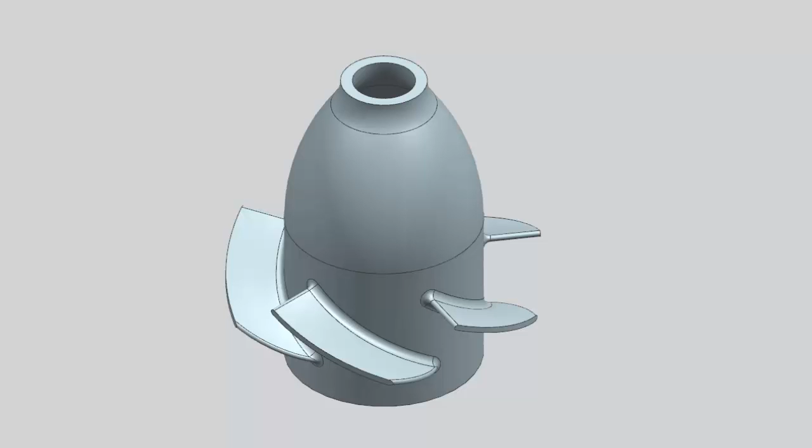Welcome to another in the series of demonstrations designed to get you quickly up to speed with what's new in NX CAM. This video will demonstrate how you can perform hybrid manufacturing by combining an additive metal deposition process with the traditional NC machining subtractive process to produce highly complex finished parts using a single machine tool setup. In this example, we'll use hybrid manufacturing to create a rotary part.

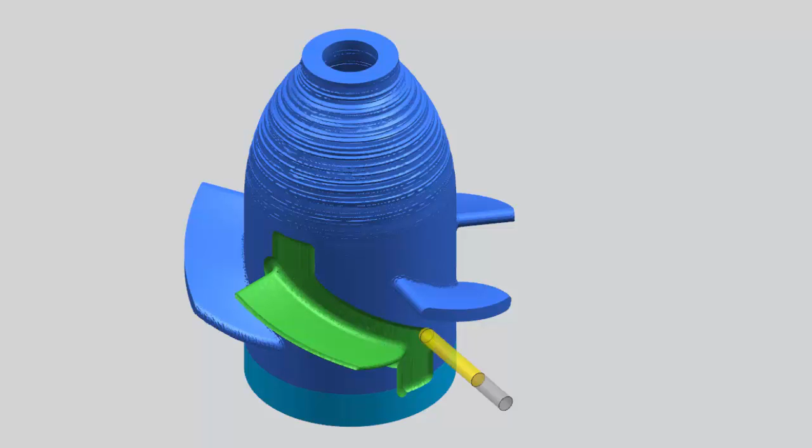Note that you will need to have an appropriate license to perform hybrid manufacturing. Let's take a look at the objects required to perform hybrid manufacturing.

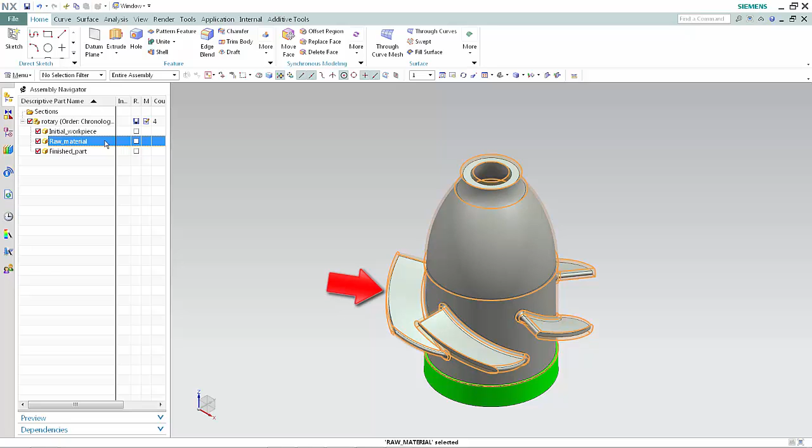The initial workpiece is the plate or base that the material will be deposited onto, and it's clamped into place as part of the setup. The additive raw material is what will be built through the additive operations. It will be selected as the blank geometry for the subtractive operations. The finished part is the final outcome of the hybrid manufacturing process and is the product of both additive and subtractive operations.

We'll begin by creating the setup. Select File New. Select the Additive Manufacturing tab. Select the template. Click OK.

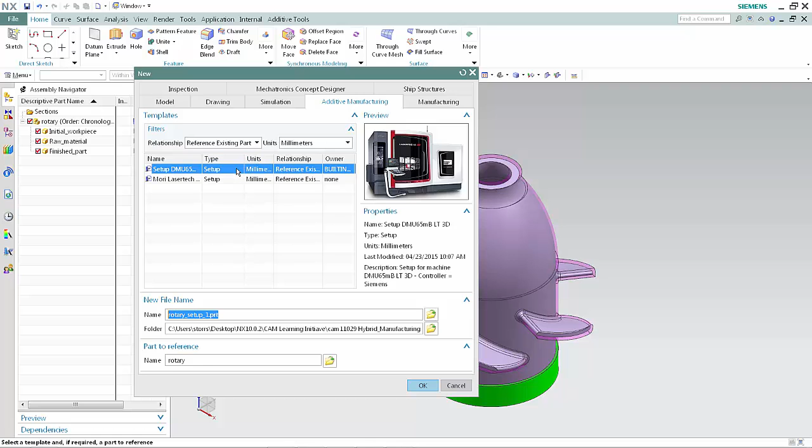The next few steps will remove some of the unnecessary clutter from the graphics window. In the Assembly Navigator, select the checkboxes so that only the initial workpiece, raw material, and finished part are displayed.

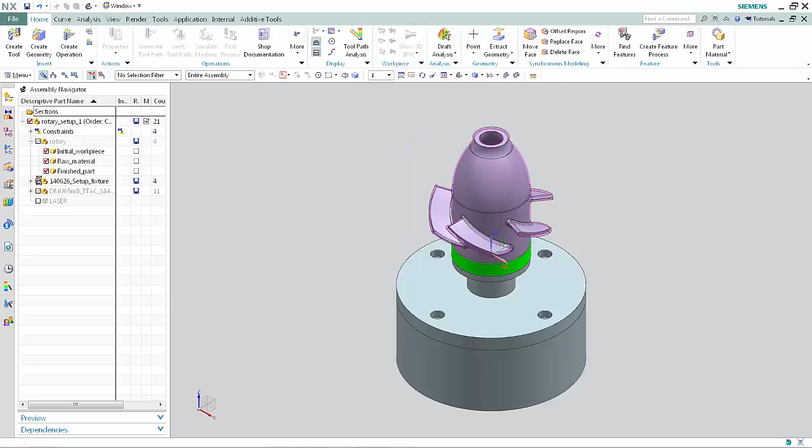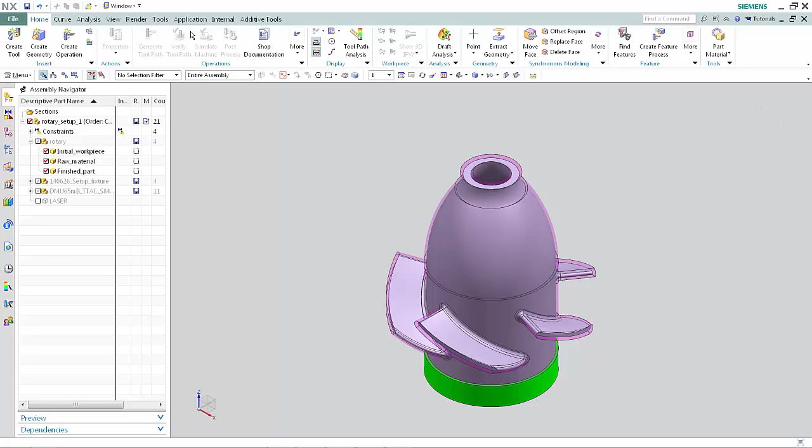Next, we'll create an associative copy of the initial workpiece, the additive raw material, and the finished part bodies. These associative copies are the bodies we'll decompose into additive features and then use for the additive and subtractive operations. Select the Applications tab and select Assemblies in the ribbon bar if it's not already turned on.

Select the Part Navigator tab in the Resource bar. Select Menu, Insert, Associative Copy, Wave Geometry Linker.

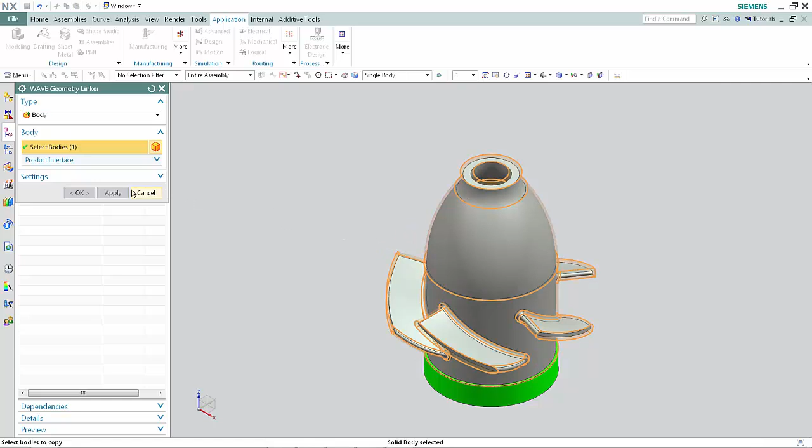Select the raw material. Click Apply. Select the finished part body. Click Apply. Select the initial workpiece. Click OK.

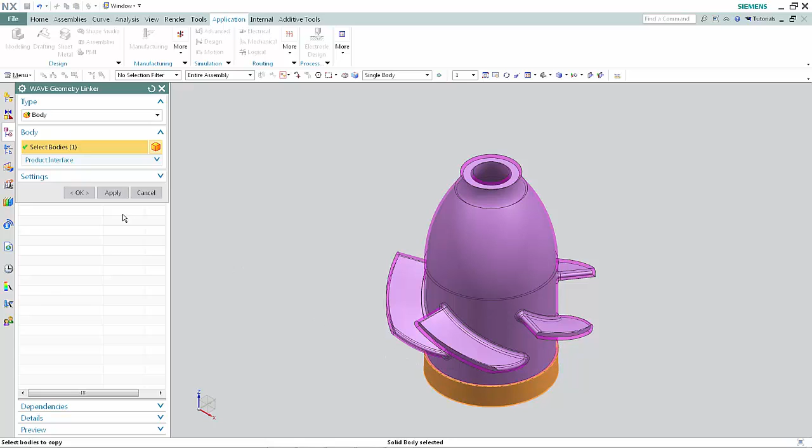Notice the three wave-linked bodies in the Part Navigator. Rename the three bodies.

For now, we will only need to work with the additive raw material linked body, so we'll hide the unnecessary geometry. In the Assembly Navigator, select the Rotary Assembly checkboxes to hide the objects.

Select the Part Navigator tab in the Resource bar. Right-click Finished Part and select Hide. Right-click Initial Workpiece and select Hide. Only the additive raw material linked body should be displayed.

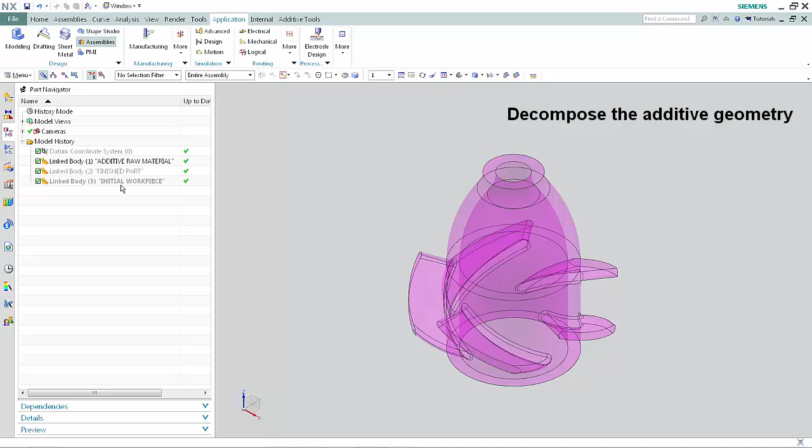Decomposition allows you to divide raw material into individual additive features by extracting bodies. Each additive operation requires a complete body or set of bodies. You may decompose explicitly or automatically.

Explicit decomposition allows you to decompose a specific volume of raw material by specifying a plane that terminates the decomposition at an explicitly defined location.

Select the Additive Tools tab in the ribbon. Select Decompose. For Select Part in the Decompose Part dialog box, select the displayed additive raw material body. For Select Face, select the face on the bottom of the additive raw material as the starting face.

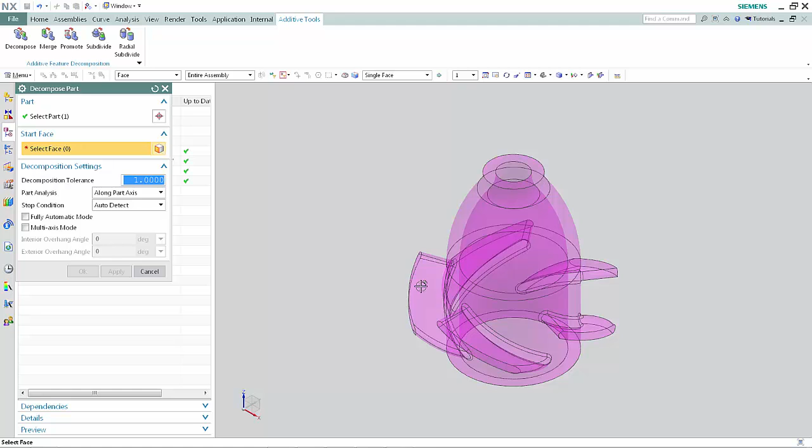Type 10 in the Decomposition Tolerance box. The decomposition tolerance is the increment that the processor uses to step along the part. Larger values result in faster performance, but the value should not be so large that small features will be missed.

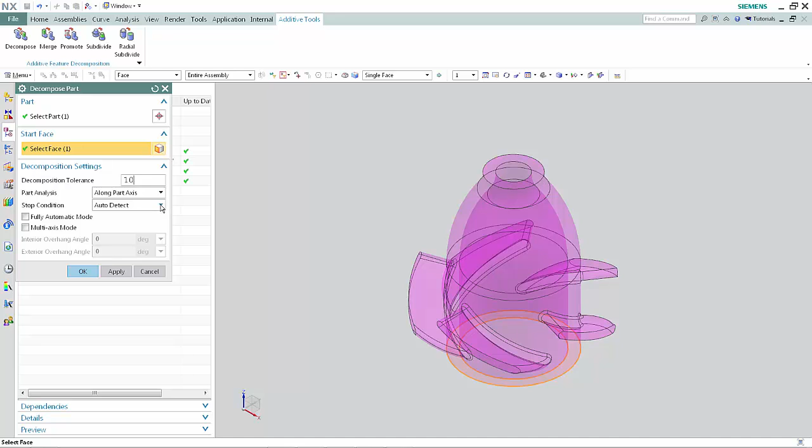Select Stop at Plane from the Stop Condition list. This option allows you to be very specific about the portion of the body you wish to decompose. Select the edge of the additive raw material just above the blades. Click OK.

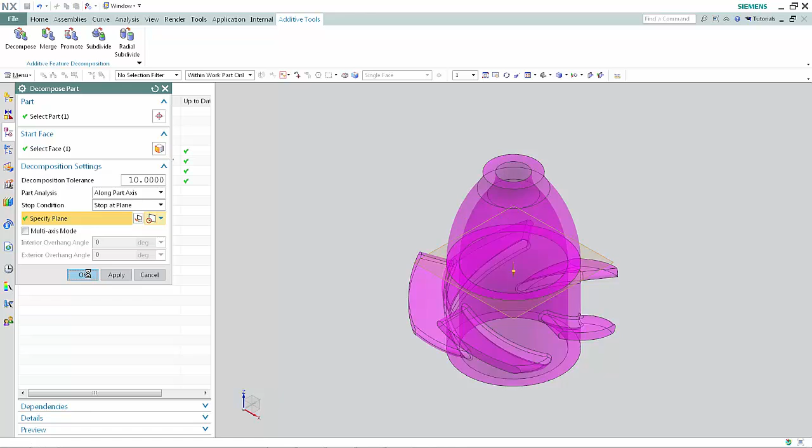The portion of the body between the selected face and the plane has been decomposed into additive features. These new features can be used to create an additive operation.

Next, we'll specify the geometry needed for the additive operations. The base plate is the body onto which the additive material will be initially deposited, and the raw material represents a slightly oversized version of the finished part.

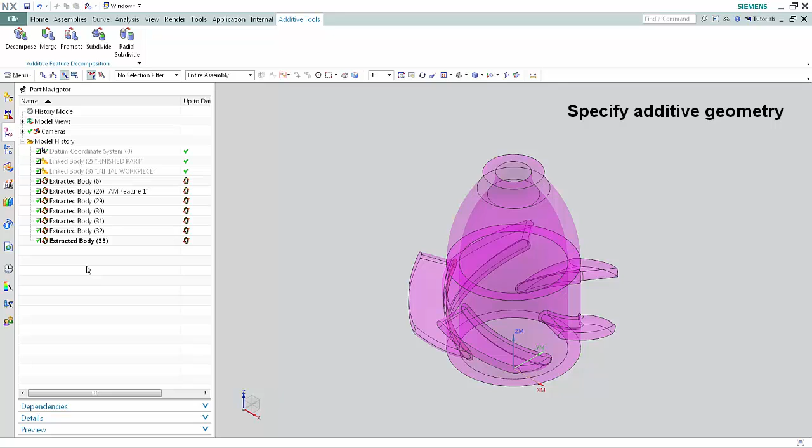Right-click Initial Workpiece and select Show. Select the Operation Navigator tab in the resource bar. In the Geometry view, double-click Hybrid Geometry to edit the object. Click Specify Initial Workpiece.

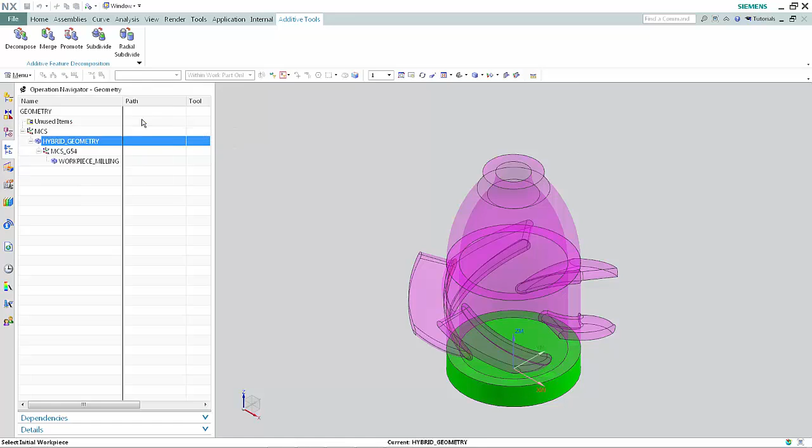The initial workpiece is the plate or base that the additive material will be initially deposited onto. Select the base as the initial workpiece. Click OK.

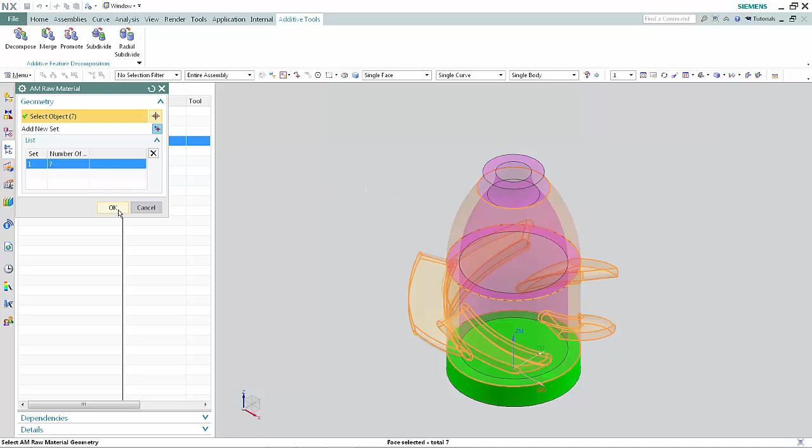Click Specify Additive Material. Select the 7 extracted bodies. Click OK. Click OK in the Hybrid Geometry dialog box.

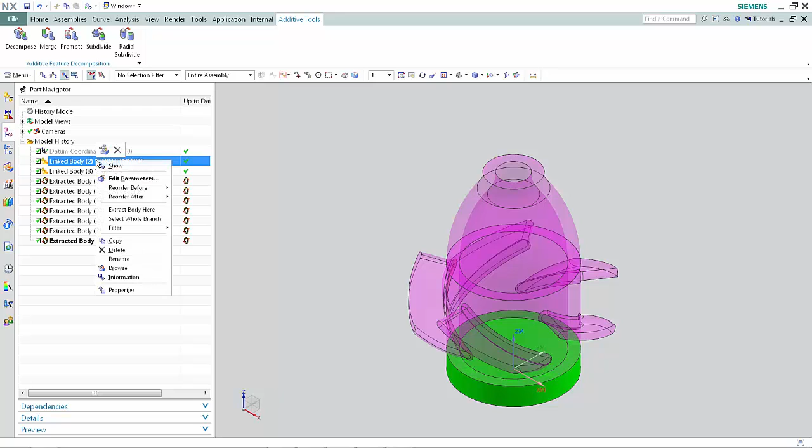Now we'll specify the part and blank geometry for the machining or subtractive operations. Select the Part Navigator tab in the resource bar. Right-click Finished Part and select Show so that the 7 extracted features, the initial workpiece, and the finished part are all displayed. Select the Operation Navigator tab in the resource bar.

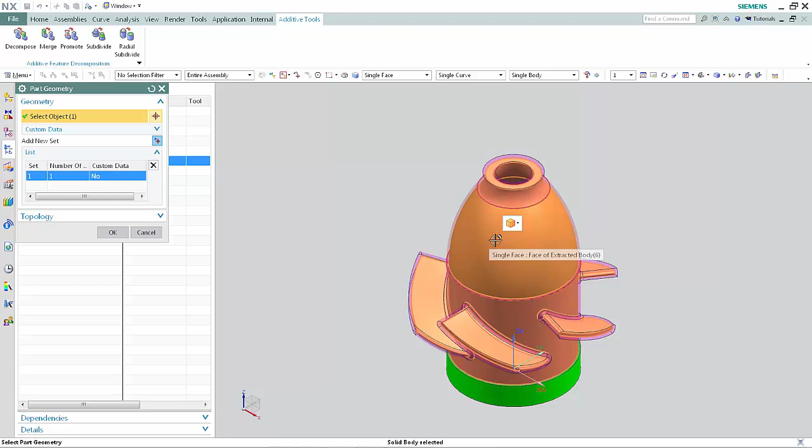Double-click Workpiece Milling to edit the object. Click Specify Part. Select the solid gray body of the finished part as the part geometry. Click OK in the Part Geometry dialog box.

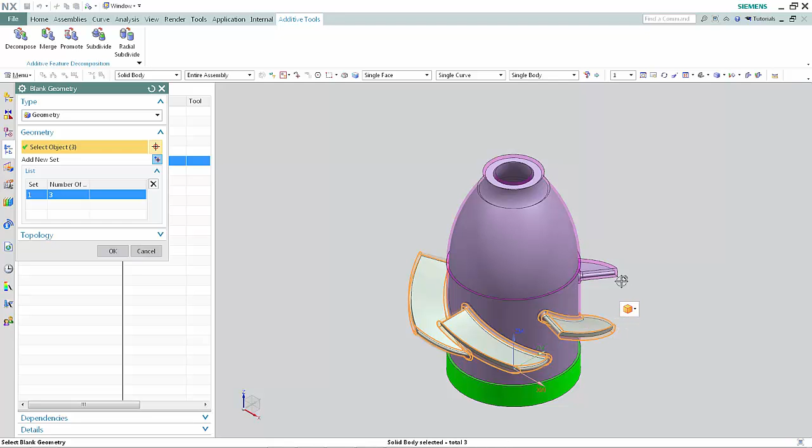Click Specify Blank. Select the 3 extracted bodies as the blank geometry. Click OK in the Blank Geometry dialog box. Click OK in the Workpiece Milling dialog box.

The first additive operation will use planar slicing and a fixed tool axis to form the cylindrical body. Before creating the first additive operation, we'll hide the finished part and the initial workpiece. This will allow us to see the material deposition as the initial workpiece is created.

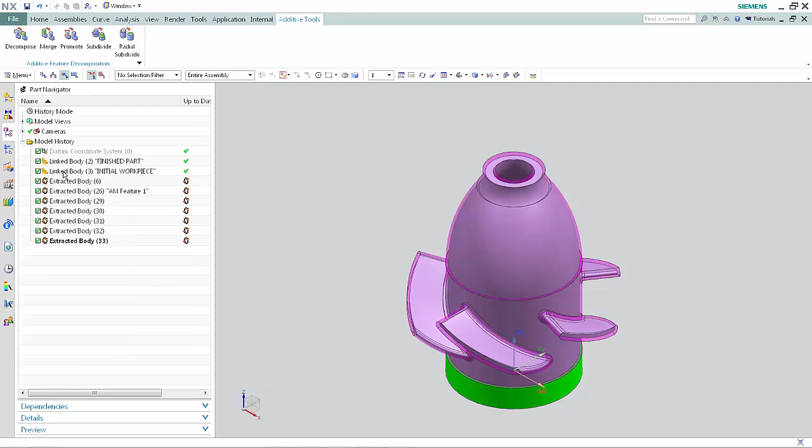Select the Part Navigator tab and hide all of the objects except Extracted Body 26. Select the Home tab. Click Create Operation.

Select Additive from the type list. Select Planar Additive Spiral Inward and Outward as the operation subtype. This operation subtype deposits material in successive planar layers using an inward or outward spiral pattern. Specify the parent items.

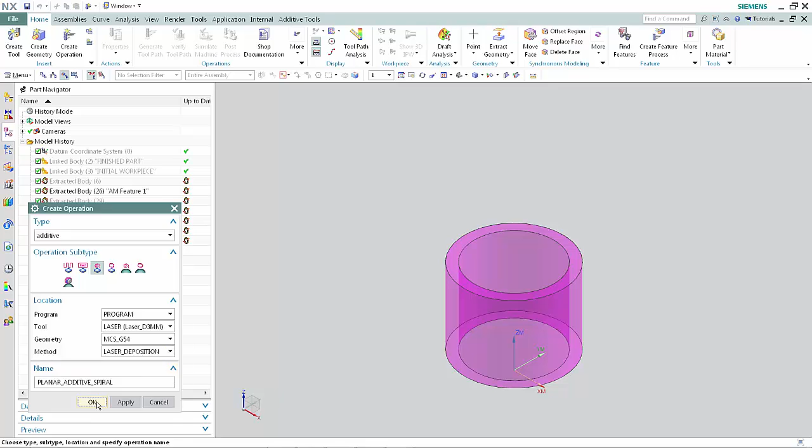Click OK. Click Specify Additive Feature. Select the body you wish the additive feature operation to create. Click OK.

Type 3 in the Layer Thickness box. This unusually large value will allow you to see the individual layers more clearly. Realistically, the layer thickness would be much smaller than 3 millimeters. Click Generate.

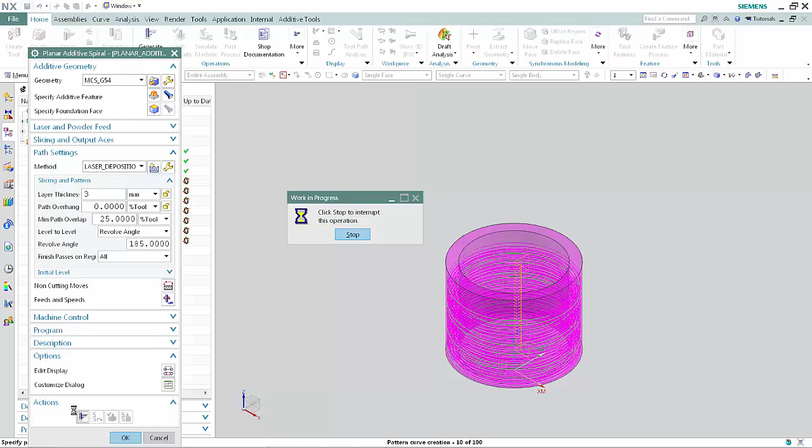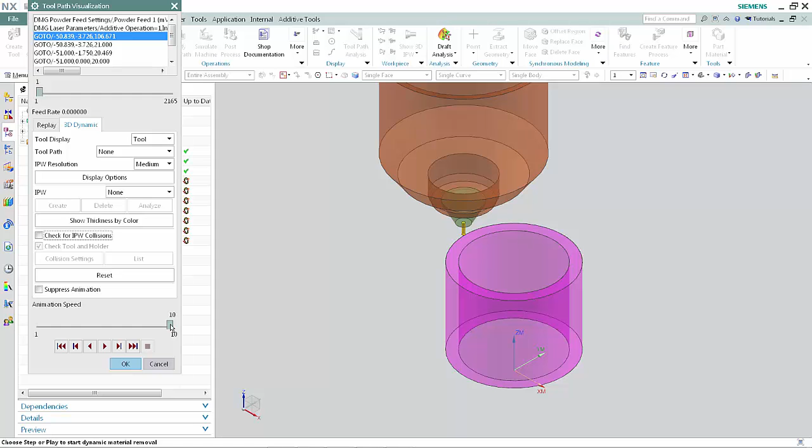Now we can visualize the additive material deposit. Select Verify. Select the 3D Dynamic tab. Clear the Check for IPW Collisions checkbox. This will improve processing time. Set the animation speed and click Play.

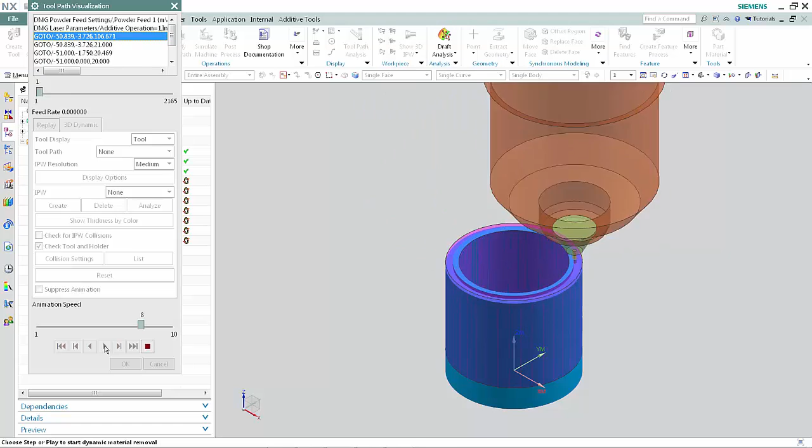Click OK to complete the visualization. Click OK to complete the operation.

Next, we'll create an additive operation that uses profile slicing and a variable tool axis to form one of the blades. Right-click and select Show for extracted body 32.

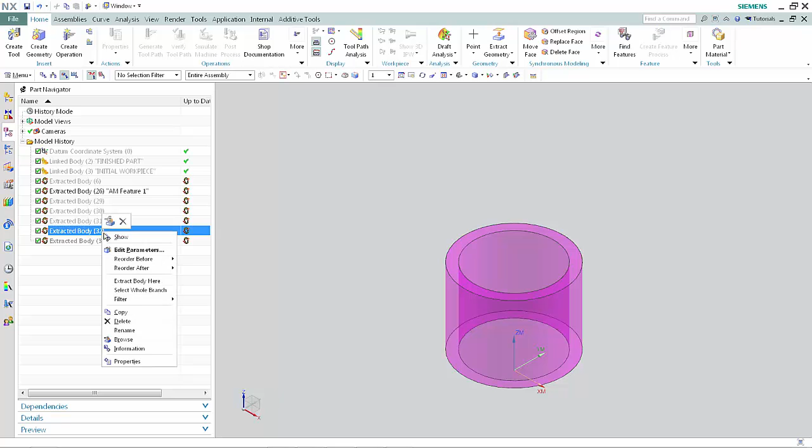Click Create Operation. Select Rotary Additive Spiral Inward and Outward as the operation subtype. This operation subtype uses a variable axis output to deposit material in successive rotary layers using an inward or outward spiral pattern on a contoured foundation face. Use the same parent items as specified in the previous operations and click OK.

Select Specify Additive Feature. Select the blade as the body you wish the additive feature operation to create. Click OK.

We'll specify the cylindrical face as the foundation face. Click Specify Foundation Face. Select the outside face of the cylinder. Click OK.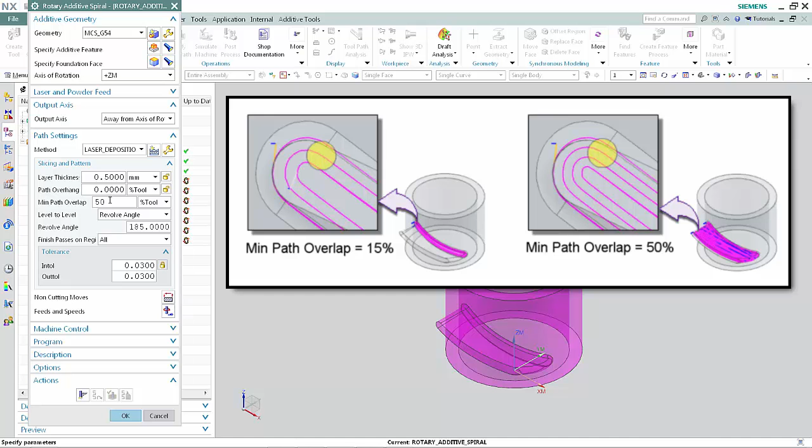Be sure axis of rotation is set to +ZM. Select Away from Axis of Rotation as the output axis. Type 50% tool in the minimum path overlap box. This is the minimum amount adjacent paths are allowed to overlap. A larger value permits a greater overlap, allowing deposition to occur within a narrower area.

Click Generate. Now we can visualize the additive material deposit. Click Verify. Click Play.

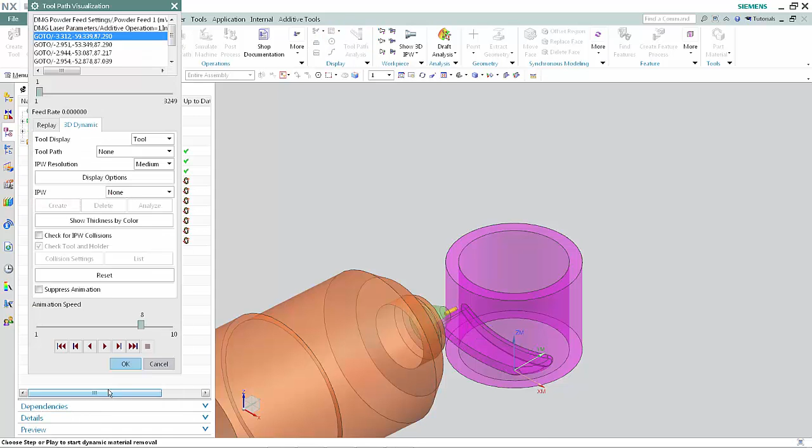Click OK to complete the visualization. Click OK to complete the operation.

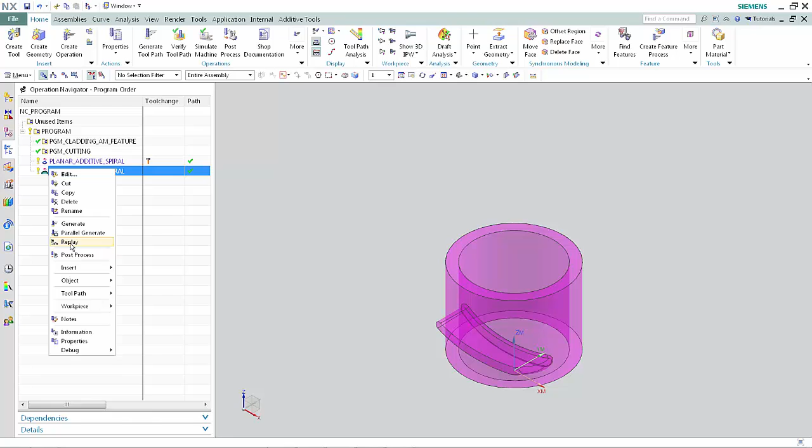Next, we'll instance the blade operation to create the remaining blades. Select the Operation Navigator tab. In the Program Order view of the Operation Navigator, right-click Rotary Additive Spiral and choose Object, Transform. Click Specify Point.

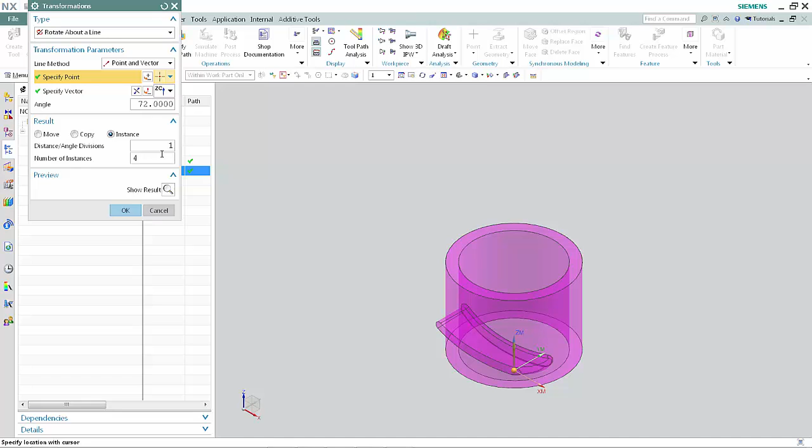Click OK to accept the XYZ coordinates. Type 360 divided by 5 in the angle box. Type 4 in the number of instances box. Click OK. 4 instanced operations have been created.

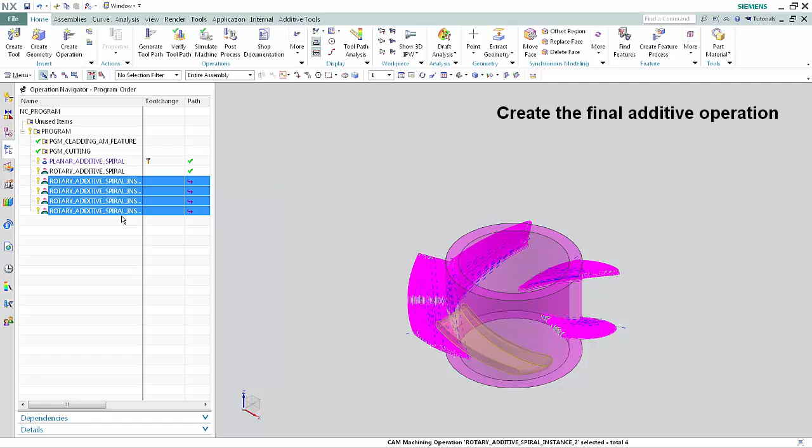Lastly, we'll create an additive operation that forms the top of the part using planar slicing and a variable tool axis that follows the contours of the additive feature when forming the inner and outer walls. A variable tool axis will form smooth walls and prevent depositing material in error.

Select the Part Navigator tab. Right-click and select Show for all of the extracted bodies. Click Create Operation. Select Planar Additive Spiral Inward and Outward as the operation subtype. Click OK.

Click Specify Additive Feature. Select the body you wish the additive feature operation to create. Click OK.

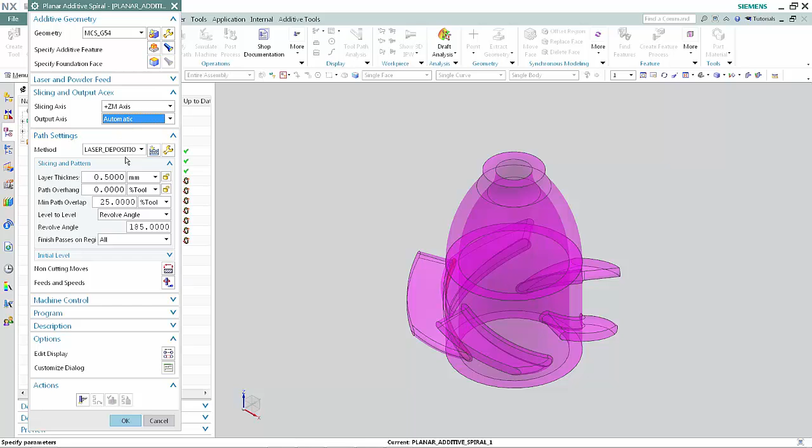In the Slicing and Output Axis section of the dialog box, select Automatic from the Output Axis list. Type 2 in the Layer Thickness box. Click Generate.

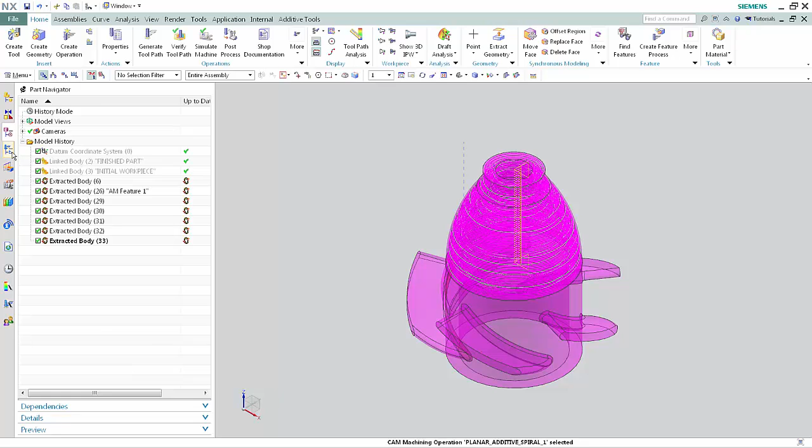Click OK to complete the operation. Now we'll visualize the additive material deposit. Select the Operation Navigator tab. In the Operation Navigator, select Program.

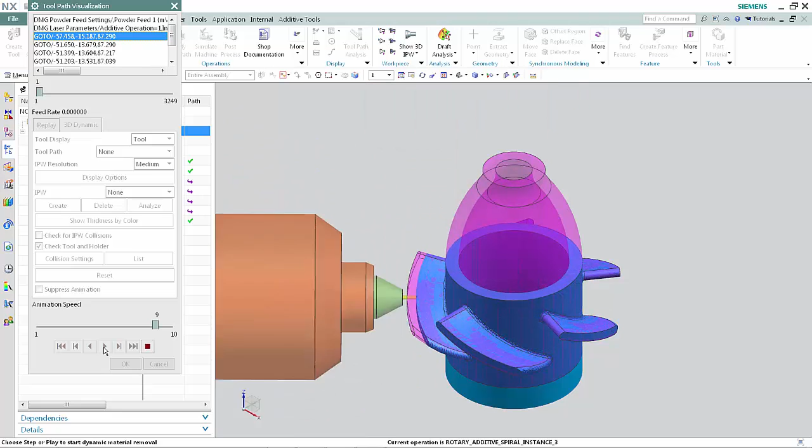Select Verify Toolpath. Click Play. Click OK to complete the visualization.

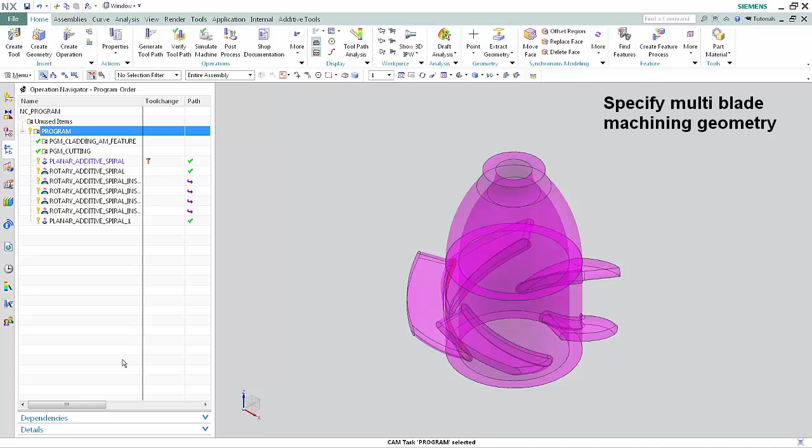Next, we'll begin the process of creating subtractive operations. We'll define the hub, shroud, blade, and blade blend geometry required to machine the part and then finish the blades and hub. Select the Part Navigator.

Show only the finished part. Click Create Geometry. Select Mill Multi-Blade from the type list. Click Multi-Blade Geometry. Select Workpiece Milling from the Geometry list. Click OK.

Click Specify Hub. Select the face defining the hub. Click OK. Click Specify Shroud. Select the face on the edge of the blade. Click OK.

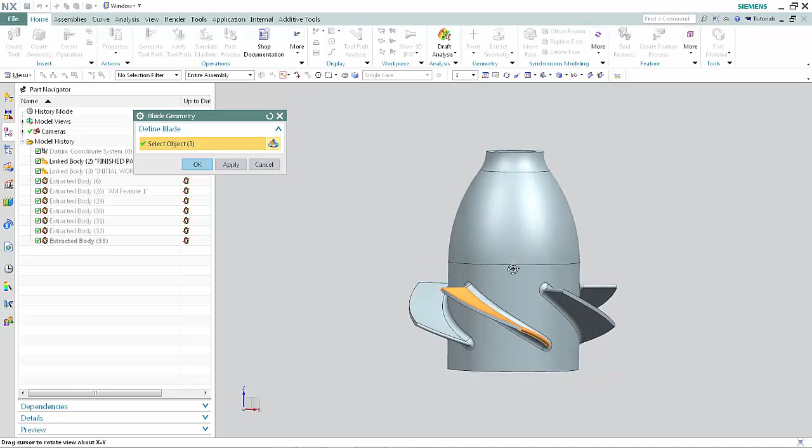Click Specify Blade. Select the three sides of the blade. Click OK. Select Specify Blade Blend. Select the four faces defining the blend of the blade.

Click OK. Type 5 in the Total Number of Blades box. Click OK.

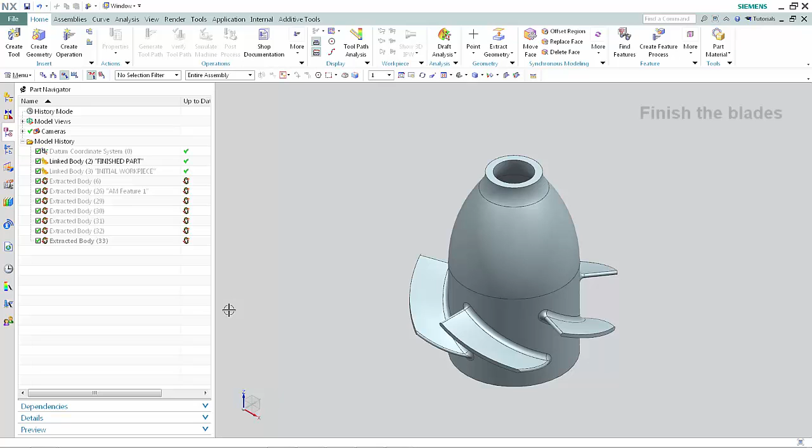Now we'll create a machining operation that finishes the blades. Click Create Operation. Select Blade Finish. Specify the parent items and click OK.

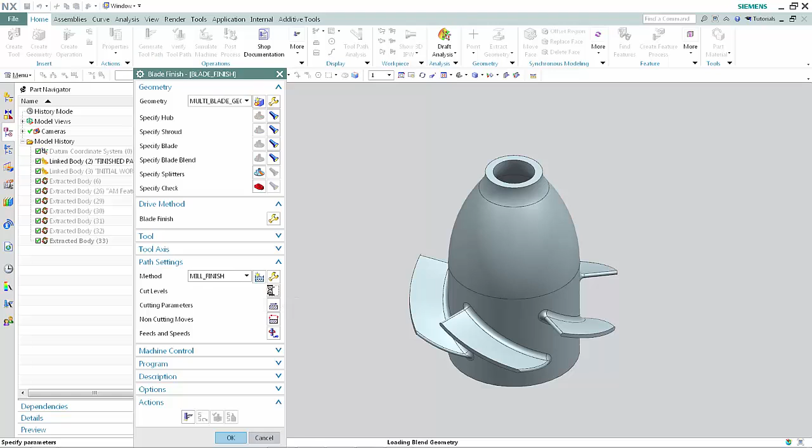Click Cut Levels. Be sure Interpolate from Shroud to Hub has been selected from the Depth Mode list. Select Scallop from the Depth Per Cut list. Type 0.05 in the Scallop Height box. Click OK.

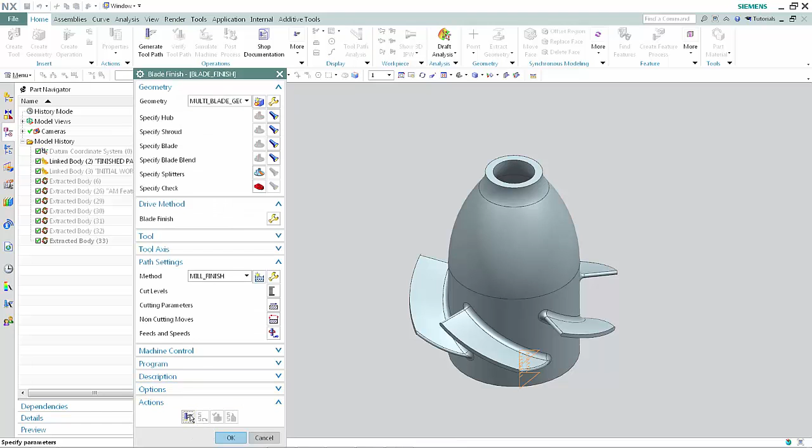Click Blade Finish. Select All Sides from the Sides to Cut list. Click OK. Click Generate. Click OK to complete the operation.

Lastly, we'll create an operation that finishes the hub. Select Create Operation. Select Hub Finish. Click OK. Click Hub Finish.

Select Along Part Axis from the Blade Edge list. Specify the distance and the radial extension. Select Zigzag with Lifts from the Cut Pattern list. Click OK.

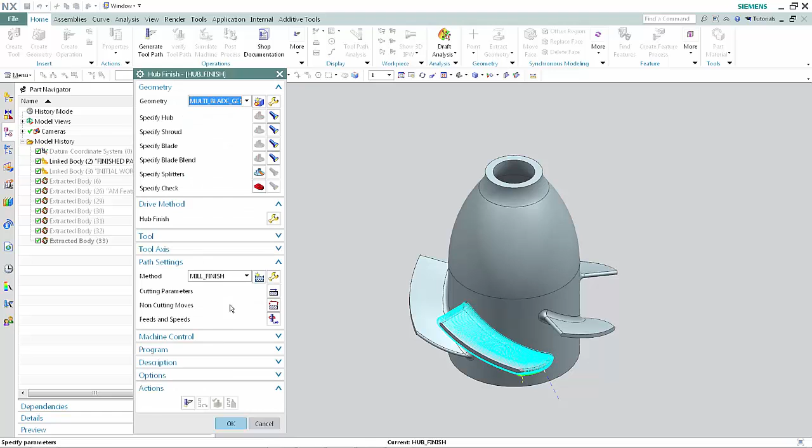Click Generate. Click OK to complete the operation.

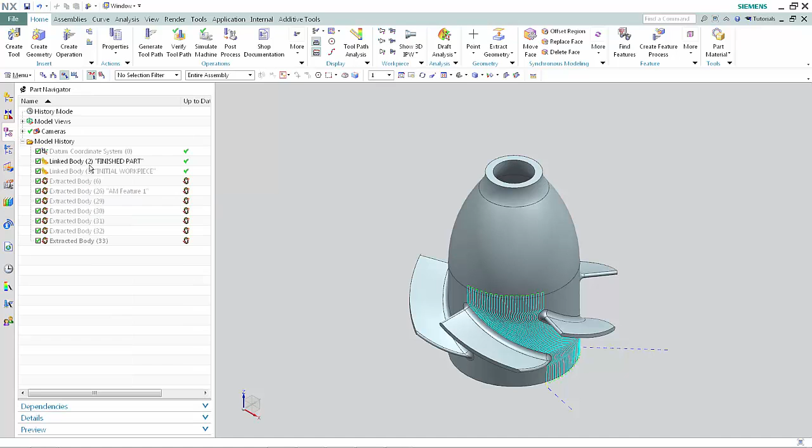The Operation Navigator shows both additive and subtractive operations. Now we can visualize the hybrid program. Select the Part Navigator. Right-click the finished part and select Hide.

Select the Operation Navigator. In the Program Order view, select Program. Click Verify Tool Path. Click Play.

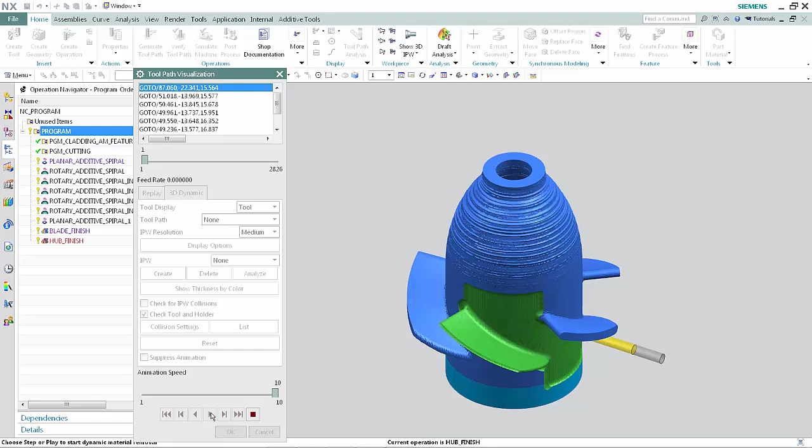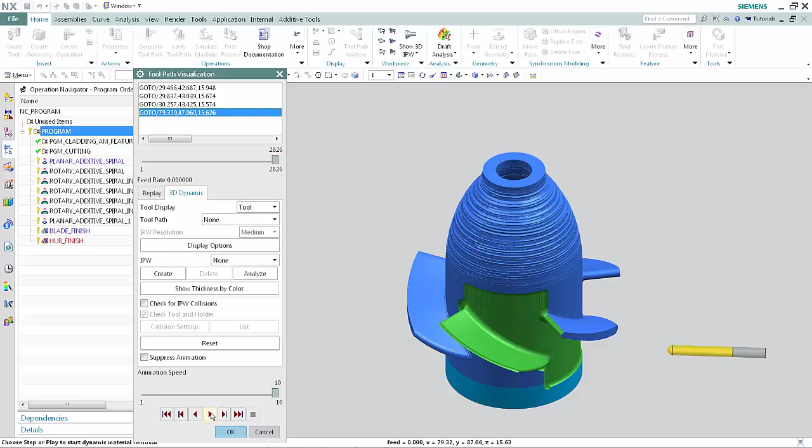The remaining machining operations would include instancing the hub finishing operation as we did with blade finishing, and then finishing the top of the part. This concludes the demonstration of how you can perform hybrid manufacturing by combining additive metal deposition with CNC machining. Thank you.